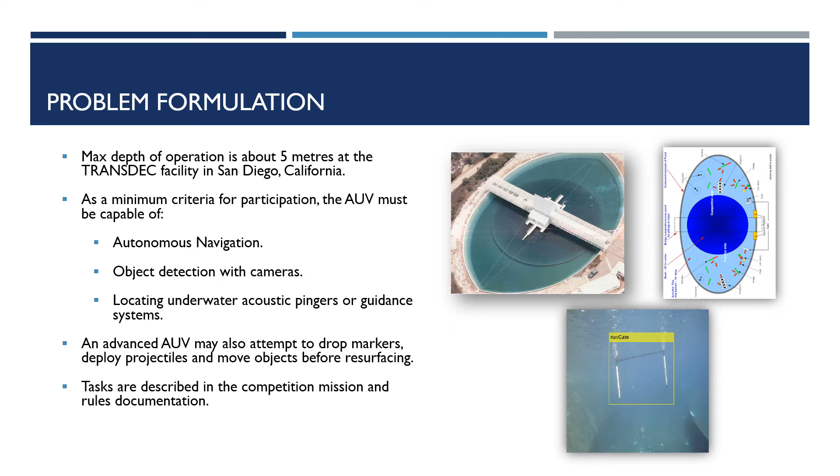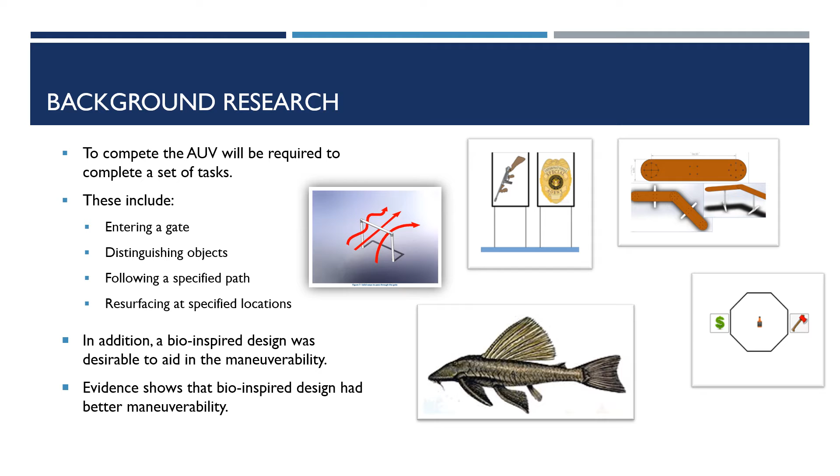Some of the requirements of the AUV competition will be to enter a gate, distinguish between objects and images, as well as follow a specified path and resurface at a specified location. In addition to designing based on the competition tasks, it is also desirable to achieve a bio-inspired design, which will help improve maneuverability of the AUV according to evidence and research so far.

Hello everyone, my name is Sumit and I'll be going over the concept generation and concept selection methodology that was used in selecting the AUV design for the RoboSub competition. After sufficient background research and through help from our supervisor Dr. Tingzu, we came up with 6 designs. I'll briefly go over these designs.

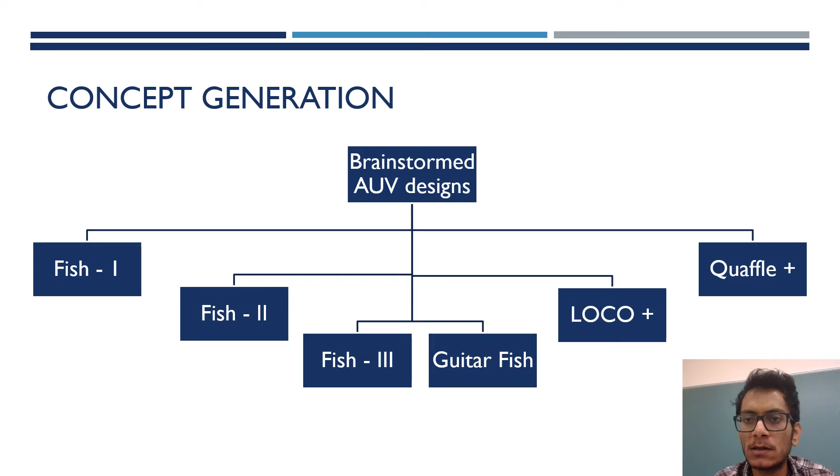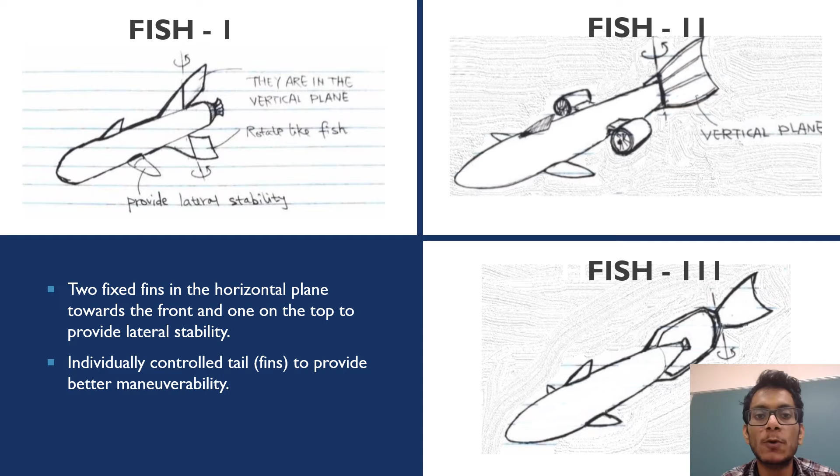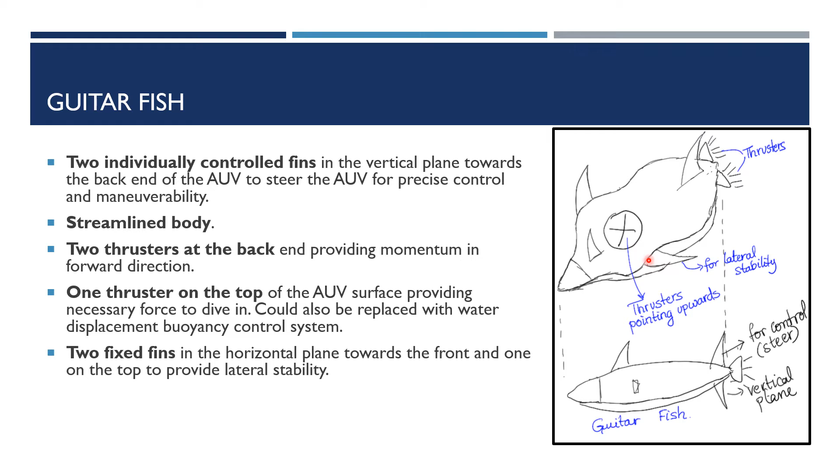These 3 designs, Fish 1, Fish 2, and Fish 3 are bio-inspired and they were considered for their simple design and enhanced maneuverability. All of them have some form of individually controlled fins towards their back to mimic the control provided by a fish's tail. The fourth design is inspired by the Guitarfish and has a streamlined body just like it. It uses 2 individually controlled fins at the back to provide precise control and maneuverability. It has 2 thrusters in the horizontal plane and 1 thruster in the vertical plane. There are also fixed fins in the horizontal plane towards the front to provide lateral stability.

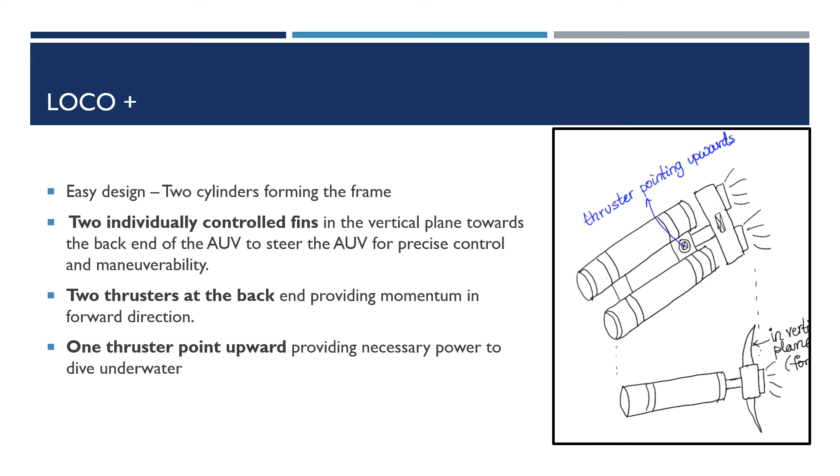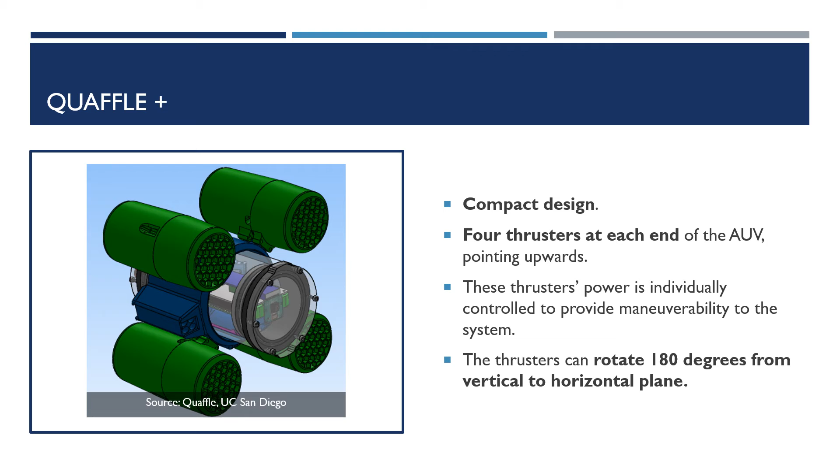Next in line is the Loco Plus design. It uses 2 cylinders to form a frame and it also has 2 of those fins in the vertical plane towards its back end for precise control and maneuverability. Overall, it's a very simple design. The sixth and final design that was considered was the Quaffle Plus design. This is inspired by an already existing AUV called Quaffle. It is a relatively compact design. It has 4 thrusters that have their power individually controlled to provide steering and maneuverability to the AUV. And also, as a novelty, these thrusters can rotate 180 degrees from the vertical to the horizontal plane.

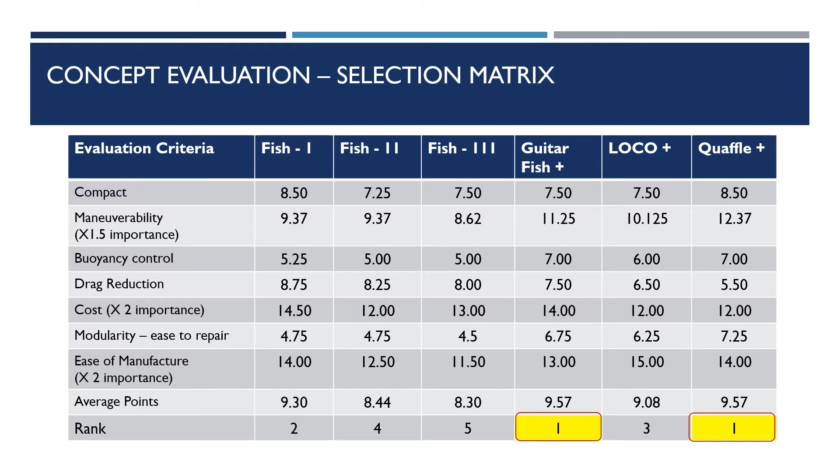After coming up with 6 designs, the team came up with an evaluation criteria. All of the 6 designs were given a score between 1 and 10, with extra points for maneuverability, cost, and ease of manufacture due to their relatively significant importance. It can be seen that there was a tie between 2 of the designs, the Guitarfish and the Quaffle Plus. Finally, after sufficient debate, discussion, and consultation with our supervisor, the team ended up picking the Guitarfish design due to its bio-inspired nature, which aids in better maneuverability, and a streamlined body for better drag reduction.

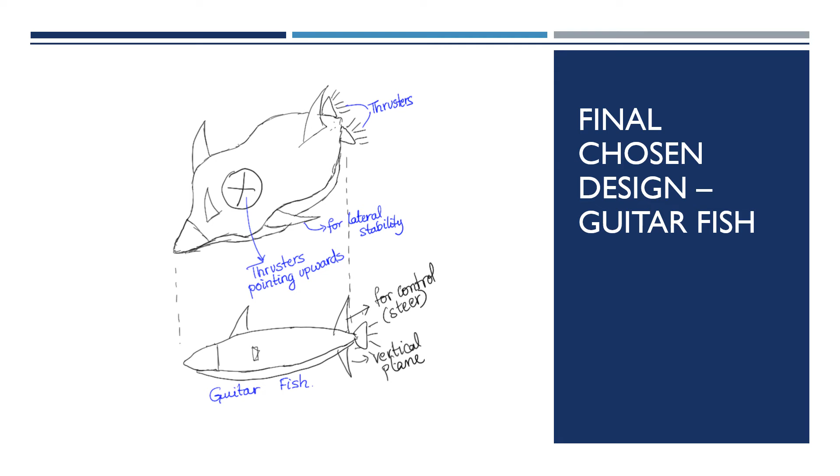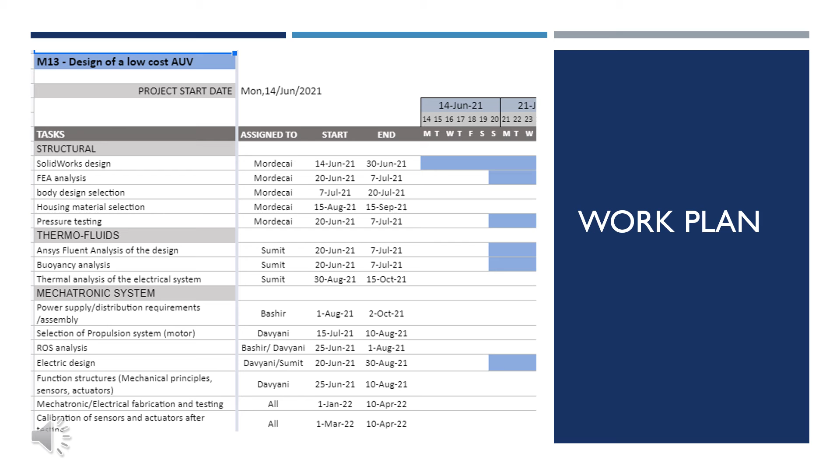Hello, my name is Davyani and I'm going to be going over our work plan. Our current work plan reflects our approach to achieving the design of the Robo AUV. At the moment, it's a Gantt chart which consists of deliverables of each of the subsystems of the AUV and a timeline to help us organize our actions. Currently, this provides us a general view of the project. Now, the plan moving forward is to get into even greater detail, and hence we are going to be using project planning software like Microsoft Teams to create subtasks and immediate tasks, assign them to the different team members, and even attach progress reports or documents and track progress as we move forward. This in the long term will be very helpful to us as the team grows in number as we move closer to the competition. Next, I'll be going into some of our major milestones.

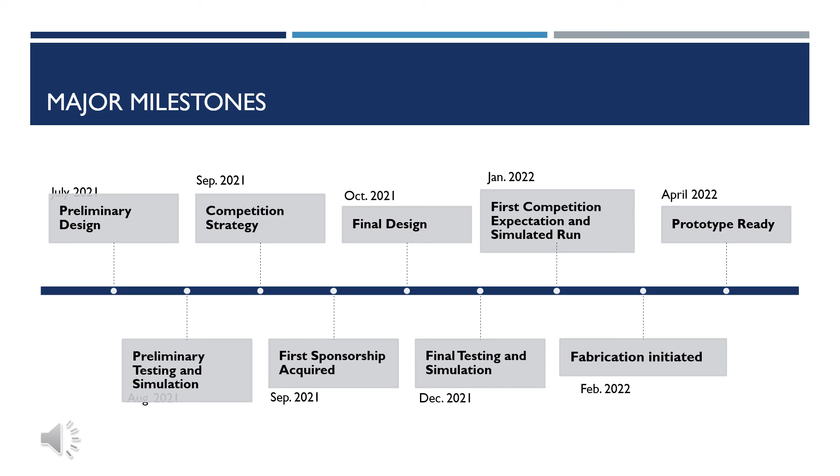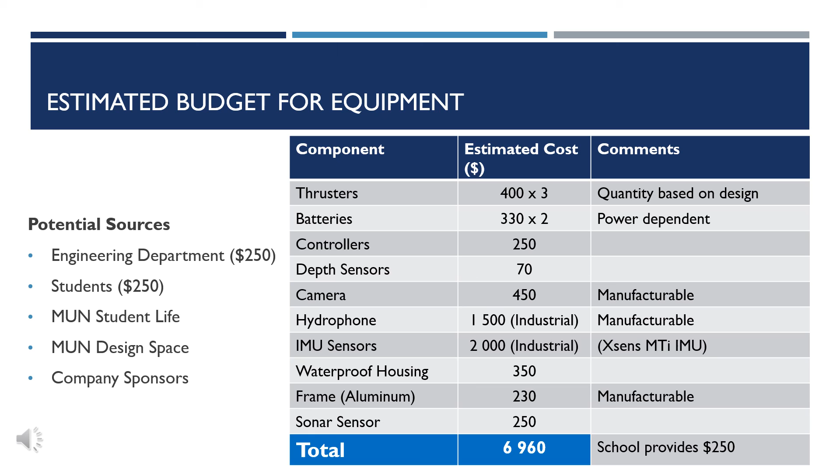In conclusion, we see this project as a unique opportunity for interdisciplinary collaboration. We also believe it is a great opportunity for Memorial University to showcase its competency on the international stage. Finally, we believe that the field of AUVs is a very relevant field for the university's context here in Newfoundland, and this is also indicated by the level of interest that a number of companies have shown in this field. One example of this is Kraken Robotics, who have agreed to be mentors for this project. We envision this to be a positive learning experience for all involved and would like to thank you for your attention.